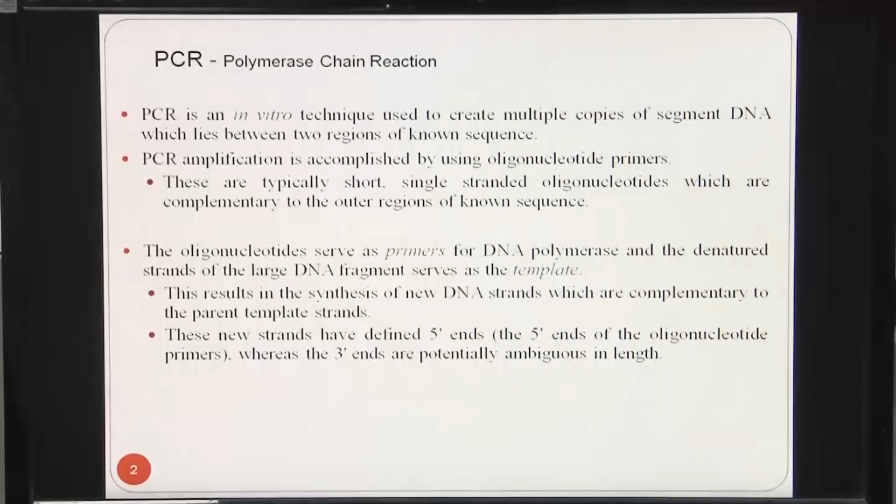Let us discuss details of PCR initially, basically why we are carrying out thermal cycling. So, PCR is polymerase chain reaction, which is an in vitro technique used to create multiple copies of segment DNA, which lies between two regions of known sequence.

PCR amplification is accomplished by using oligonucleotide primers. These oligonucleotides serve as primers for the DNA polymerase reaction, and denatured strands of large DNA fragments serve as a template. So, we initially take a PCR mix in which the targeted DNA, primers, thermostable DNA polymerase, nucleotides and cofactor for DNA polymerase are mixed together to make a PCR mixed solution.

After that annealing happens. We carry out annealing at 55 or 54 degrees centigrade depending upon the requirement of the gene amplification. The 5 prime to 3 prime primers bind to the two strands which were created during the earlier heating step.

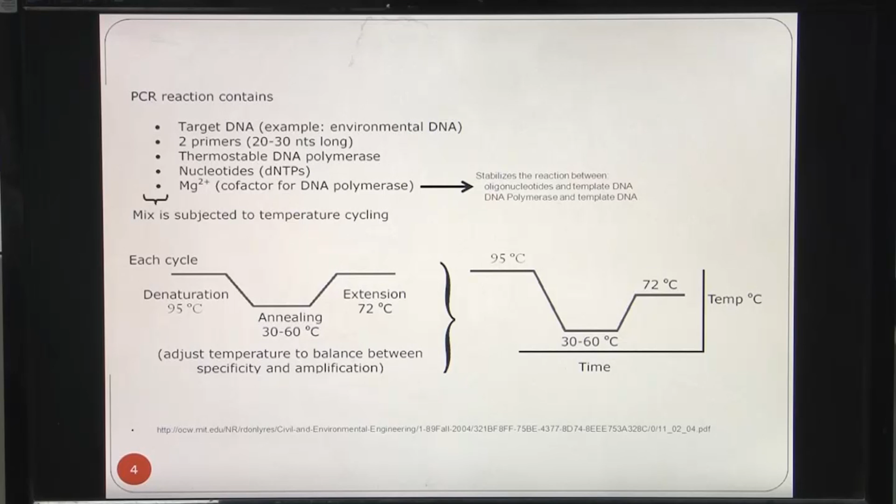Also, for heat toleration, we add magnesium cofactor for DNA polymerase for the stabilization of the enzyme, and also nucleotides, dNTPs, so that they do not get denatured, to carry out the polymerase reaction.

So now we will focus on that. As far as we discussed, we have to carry out thermal cycling to perform the PCR reaction. Here, software by National Instruments gives an opportunity to program graphically in coded form, so that we can maintain those temperatures we have discussed: 95, 55 and 72.

Now we will have a small introduction about LabVIEW, how LabVIEW works and how information flows in the program. There are various blocks and interfaces like for loop, while loop, etc., which are used in text languages like C, Java, etc. But it is far different from those. It uses a graphical language.

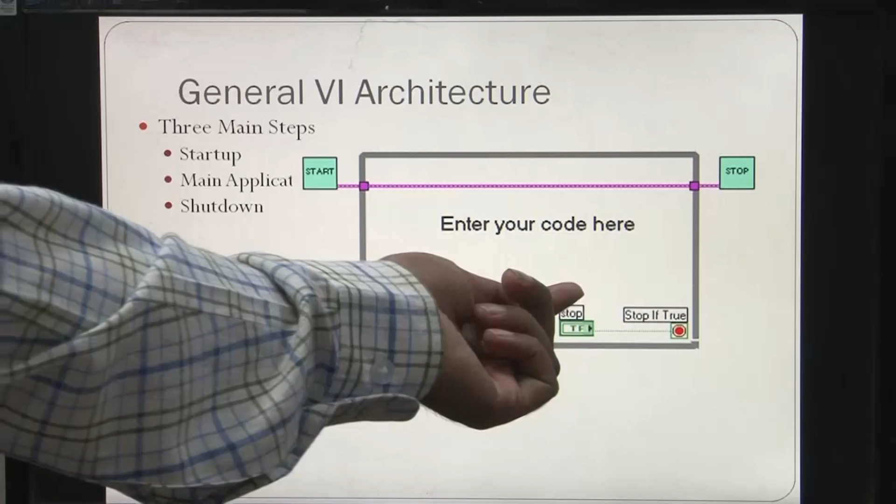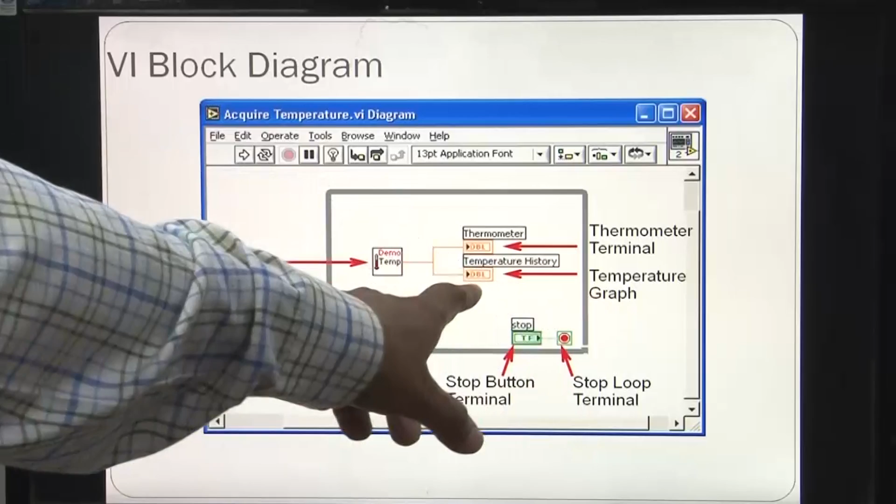So, here the thermometer terminal is called, and the temperature graph will be plotted over there, which is shown on the front panel. And then after the calculation we can stop. The stop button is also provided here, which is shown in the block diagram. So, these are the main components of a LabVIEW program. Again I am repeating, one is the front panel, the other is the block diagram.

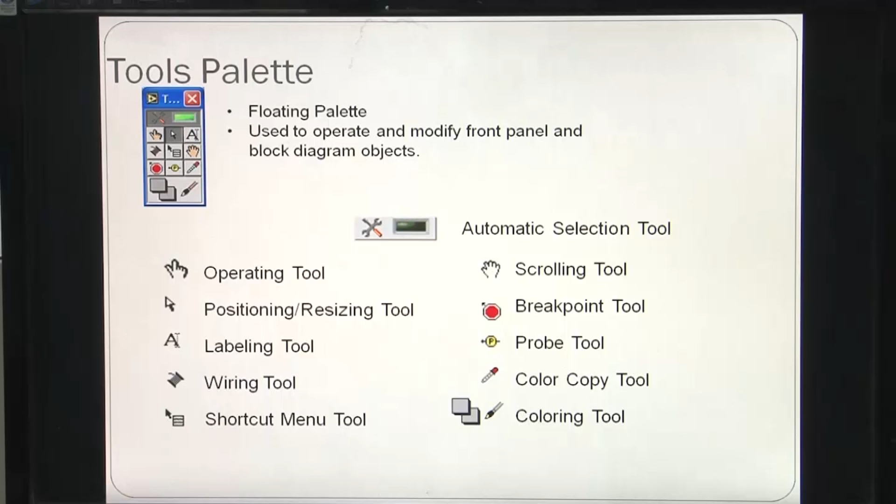So, these are tools palettes. There are different types of tool palettes, as I already discussed. These are the symbols shown there: operating tool, positioning/resizing tool, labeling tool, wiring tool, shortcut menu, scrolling tool, breakpoint tool, probe tool, color copy tool and coloring tool.

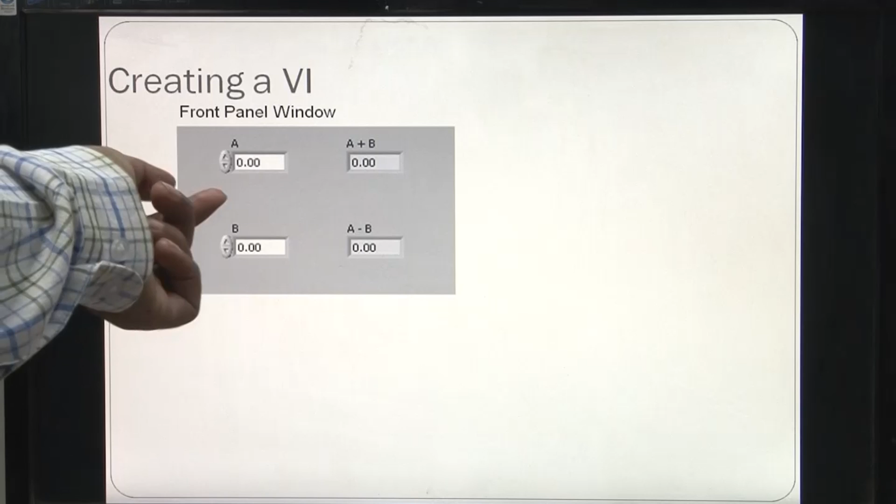The front panel has an A value and a B value. Okay. Now the operation has to be done, A plus B and A minus B. So, whatever values are entered in the A block and B block, it will add or subtract the values, which will be done after execution of the program. So, let us see the block diagram of this.

So, here are the wiring tips for the block diagram. As you can see here in the block diagram, this symbol is attached with this particular symbol. So, how will the information go to this place? The wire is attached to these two symbols, so that whatever value is entered here has to be transferred to the next operator, which is basically carrying out addition. That is why these wires are connected.

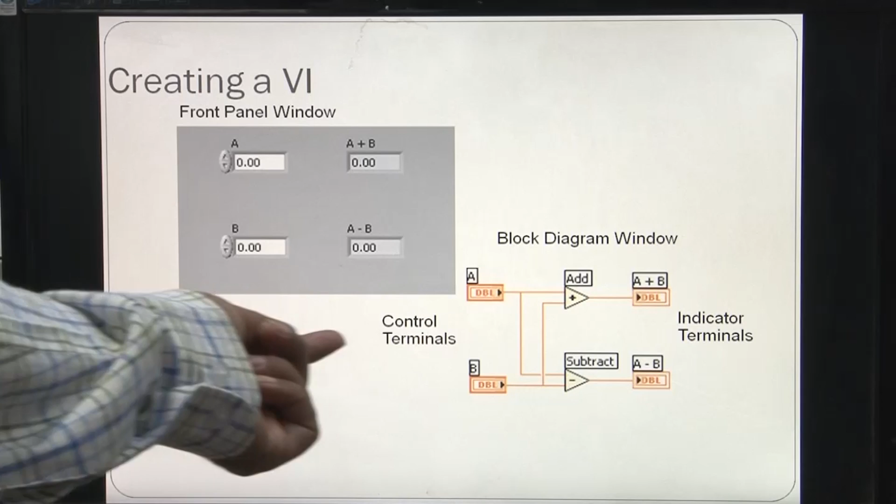In different languages like C and Java etc., some parameters carry the information, but here in a graphical language, these wires are basically forwarding the information from one VI to another VI, or one symbol to another symbol. I already talked about it. This is data flow programming basically, how the data will flow. I have already discussed that.

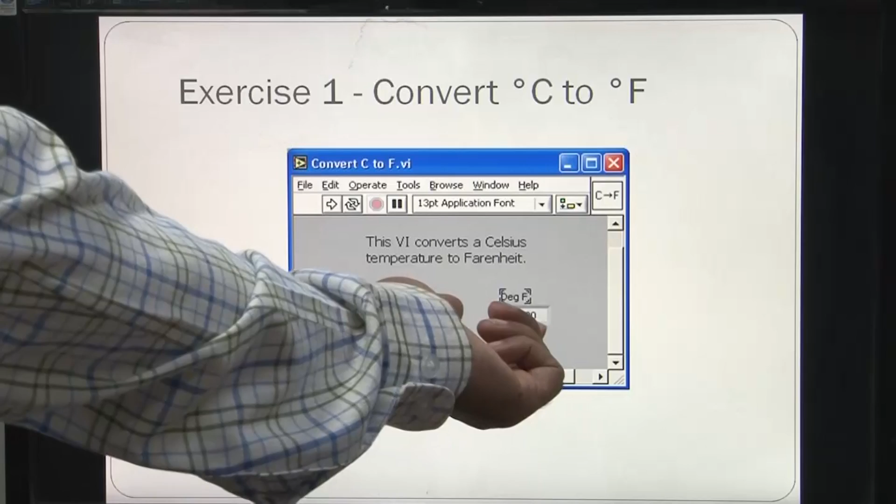If we enter number 1 and number 2, after some operation it will give you some result which will be displayed on the front panel. So, likewise these 3 programs are there that you can see. If you are not able to understand what a symbol stands for, you can go through the help that is available in the software. So, this is exercise 1, where this VI converts a Celsius temperature to Fahrenheit.

So, for debugging we carry out this step, and these are the sub VIs. A sub VI is a single VI which is called in the main VI file, in which we are programming. These sub VIs are called in particular main programs, so they will work according to their programming. These sub VIs can be used within another VI, as I already discussed. So, these are the advantages of sub VIs.

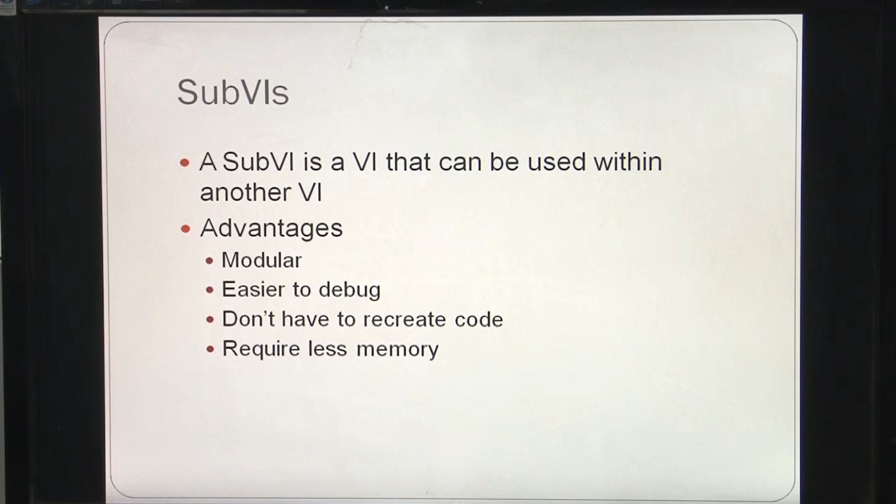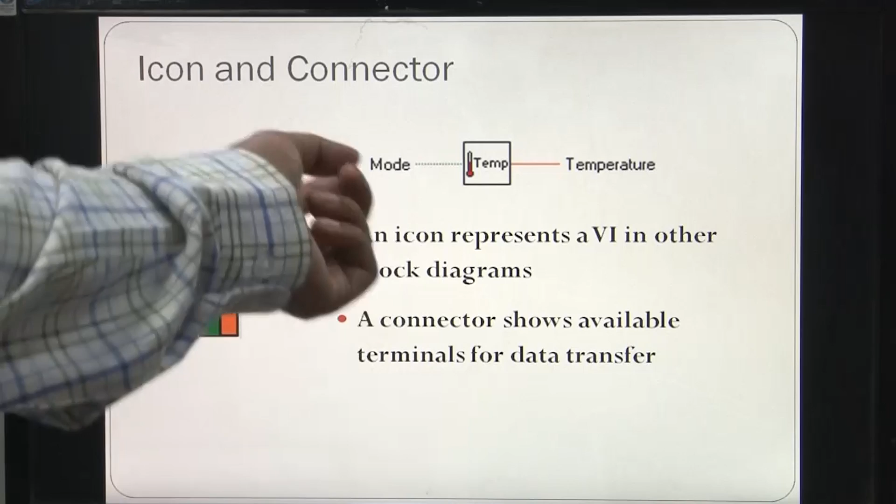So, these are icon and connector. Here we can see the connections are made in the form of different wires, like green and some orange type. You can see mode and temperature. The connections are made over there in a different form.

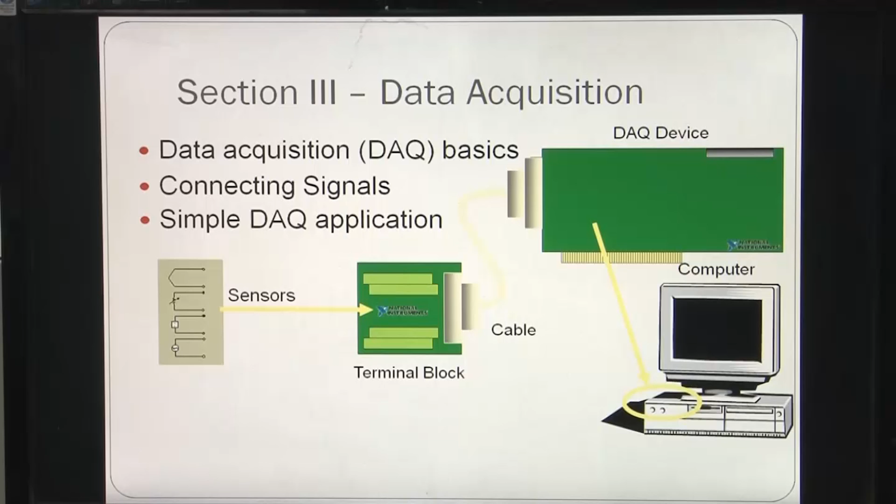So, these are basically data acquisition systems, a plug-in board for a computer with analog input channels and analog output channels, counters, and digital input output. So, a simple temperature acquisition example is this, with two parameters: device 1 and channel 0.

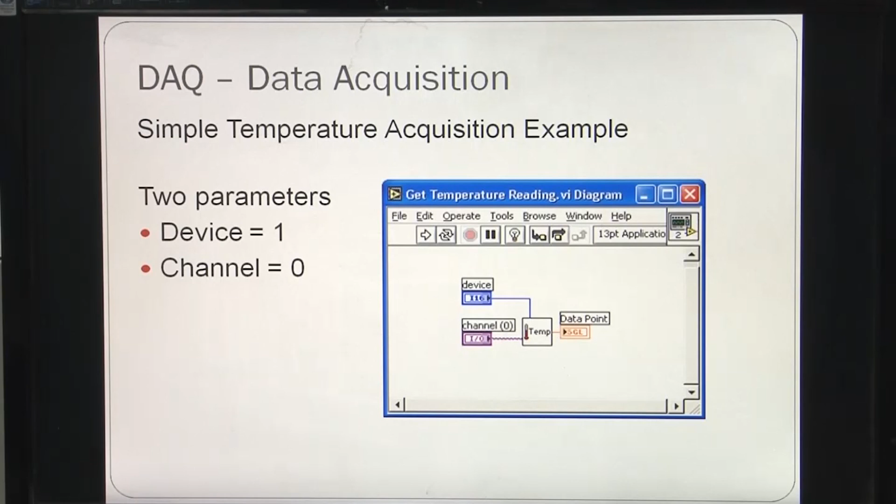So, device 1, which is called here I16, will be a kind of thermocouple that will measure, and the channel is where this thermocouple is mounted. So, the channel address is there. So, that is how we have created this data acquisition. After sensing, the data will be displayed on the front panel.

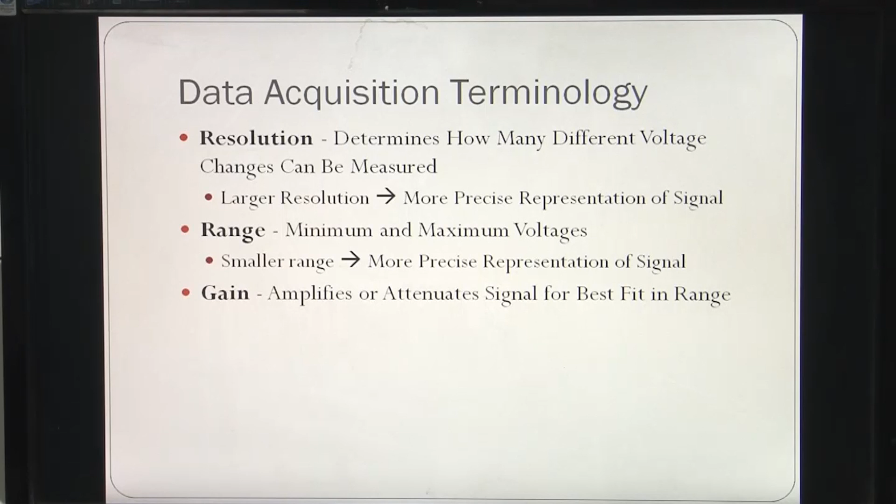So, let us discuss loops and charts. Different loops and charts are used in LabVIEW programs, like for loop, while loop, and different charts and multiplots. Loops have an iteration terminal. The while loop always runs once and then runs according to the continue terminal, while the for loop runs according to the input value, whatever value you provide, like if you want to run a program 10 times.

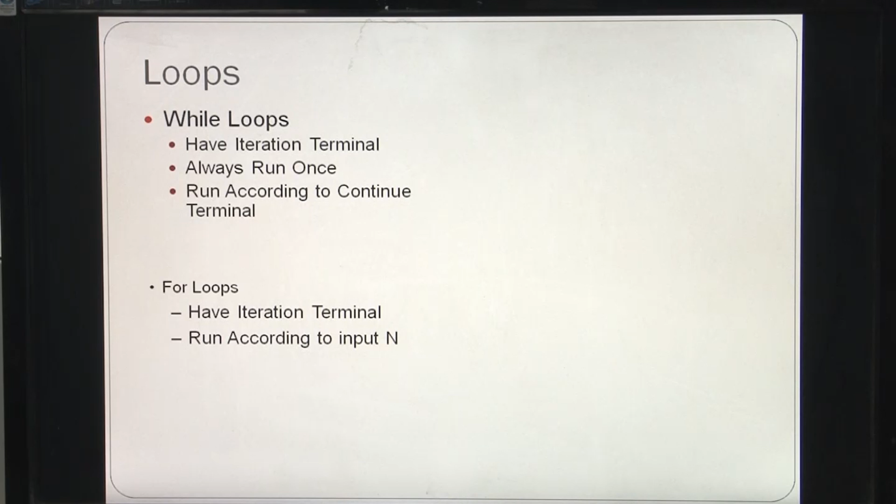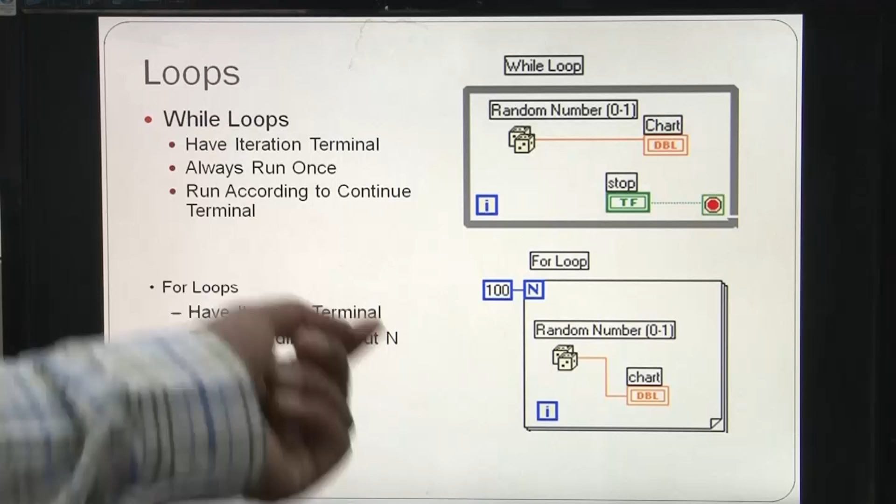So, whatever values are created can be displayed on the chart, and here you have provided a value of 100, while here you have not provided a value, because the while loop works in such a manner that when you switch it on it will run continuously until you stop it, while the for loop will run up to the particular cycle or point which you specify. So, these are important loops on which the whole LabVIEW program works.

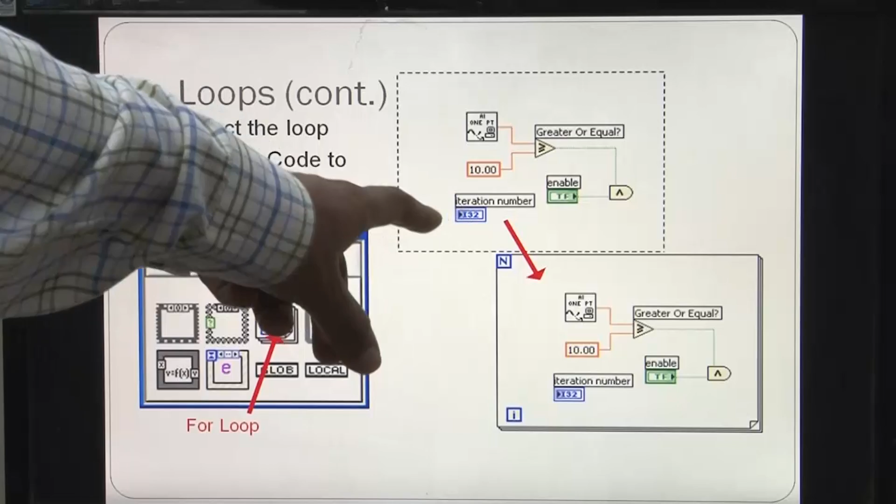These are loop structures. These are different loops shown here. Here you can see this symbol shows a for loop. So, if a for loop is applied, you can call it like this. If a condition is given, greater or equal, then whatever number you supplied initially, if it is greater, it will show on the front panel, or the iteration takes place depending upon the coded instructions.

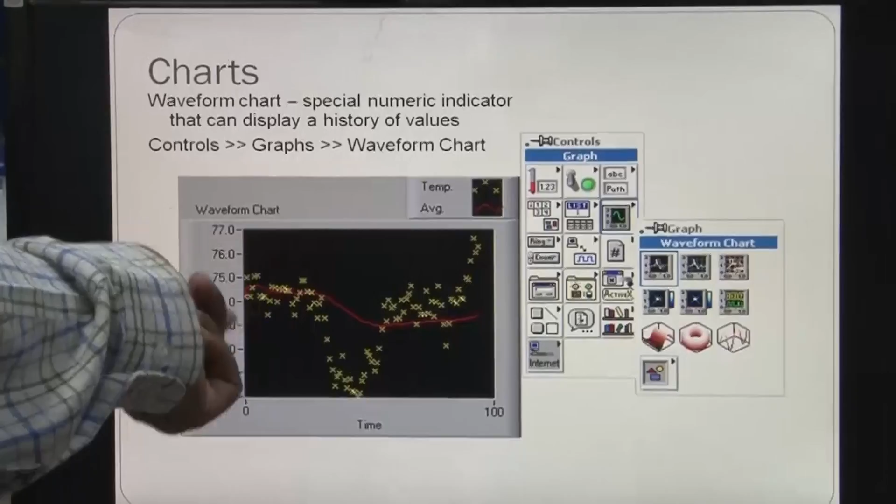So, these are charts. Whatever value comes as an output can be plotted over a chart in the form of different parameters in which you want to plot. These are symbols for plotting the graphs. These can be coded. These are small VIs which already exist in LabVIEW, which you call in the main program, which will create those charts.

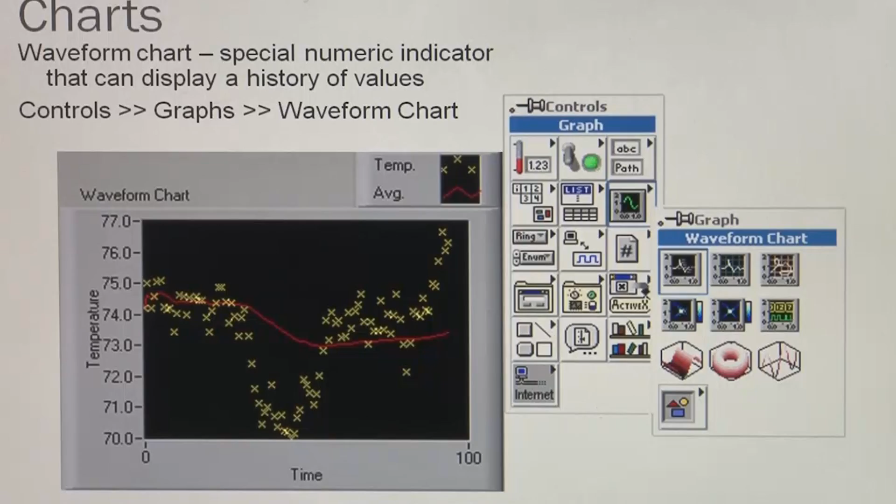So, whichever type of chart you want, you can modify according to your requirement, like whether you want to carry out a 3 dimensional study or a 2 dimensional study. So, you can use different charts for different purposes. These are wiring data into charts, like single plot charts, and this is multi plot charts.

So, for creating multiple charts you have a different symbol, while for a single chart you have a different symbol. So, that way you can have multiple charts, and this is monitoring the temperature. Okay. So, again this is the same program which we have discussed.

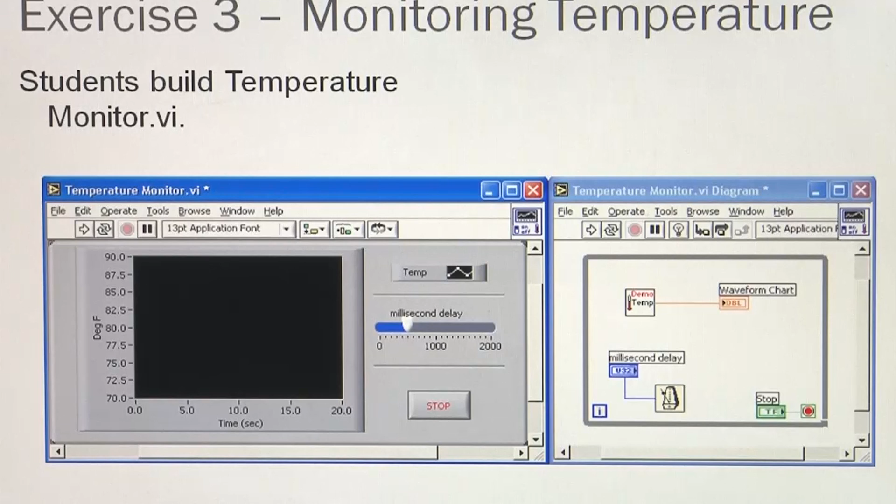As the requirement of the operation, those created array values can be written into a spreadsheet, which can be opened in Excel or WordPad. From that particular Excel sheet or WordPad, we can read the information of which column and which row which value is there. That way we can see those values, and these are basically adding an array to the front panel.

So adding an array basically places a data object into the shell, a digital control. So here you supply those array values on a front panel, and that will be displayed there, and also the current value will be shown to you.

So that way you can scroll down for the particular column and row to see which element is there, like C11 or C12. Suppose this is one row, and 1, 2 up to 5 columns are there, and they have different values.

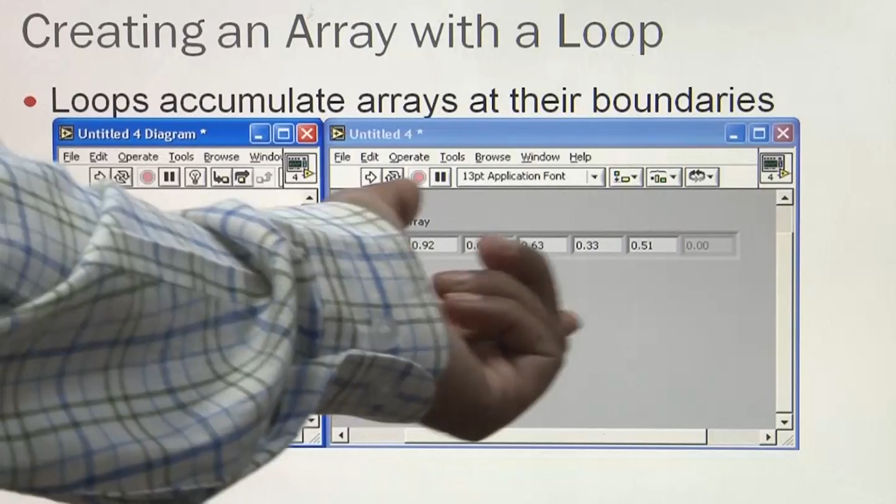So now suppose you want to call the number, suppose the fifth element of this row. We can scroll down and call this number. That will show what number exists at C5, the C5 value, showing you that particular value.

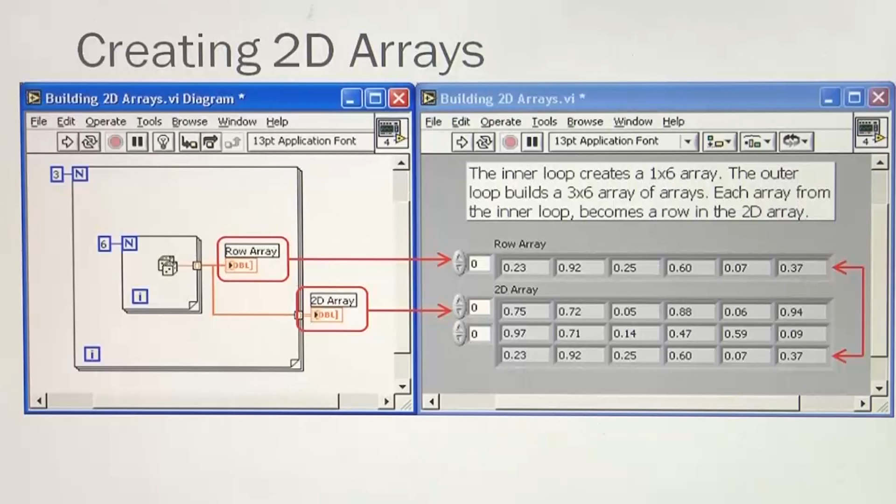So these are basically file input output in which read and write activity takes place. Suppose you want to save data, you have save symbols in different forms available. That way you can read and create an output also. These are 2D array files, basically this is a block diagram of 2D array files.

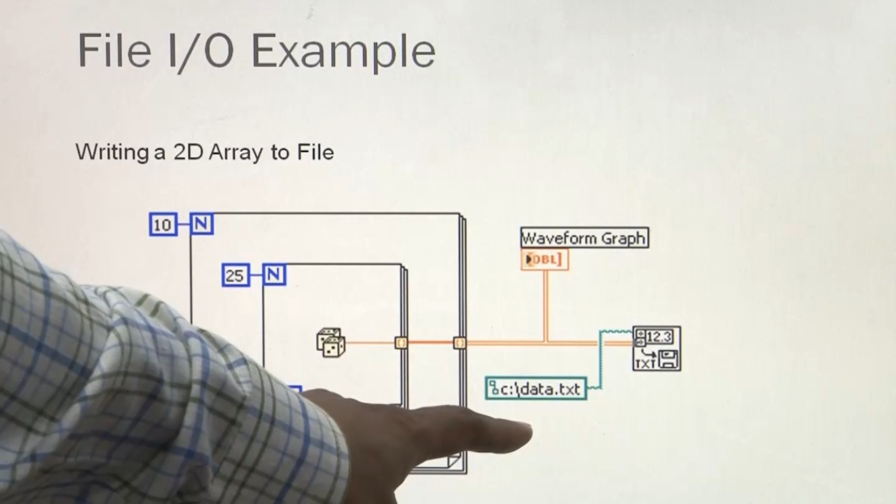Suppose you have a set pattern on the spreadsheet of a particular array. You can call that data which is available with you from an experiment carried out earlier, and you want to analyze it for a certain thing. So you can give a directory to the file, and this directory will be called and executed for making that array, and then that array value can be utilized for the program purpose.

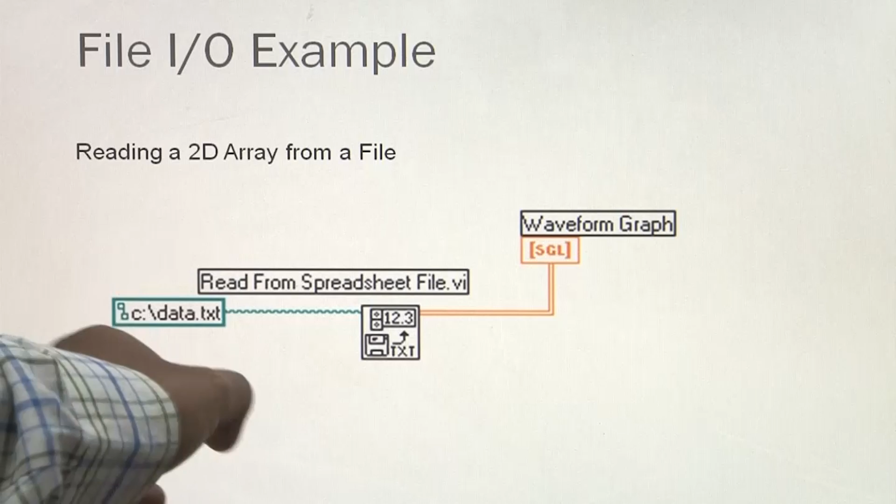This way you can generate the waveform of that particular array if you want. And this is like analyzing and logging data, basically for analysis of data whatever you have got during the execution of the program.

So you have different symbols, suppose you want a mean value, or you want to compare maximum and minimum values, you have a different symbol for that. That way you can analyze that data using the different symbols. So these I have already discussed.

Let us discuss about strings, clusters and error handling. Earlier we have discussed about the cluster symbols, but we will discuss what it is. A string is a sequence of displayable or non-displayable characters in ASCII format.

The cluster basically is a data structure that groups data together. You may have different data at different places, and if you want to put that data together in a particular place, the cluster can be used. Data may be of different types. It is very analogous to structures in C language. Elements must be either all controls or all indicators. So it can be thought of as wire bundles into a cable. This is how a cluster situation can be visualized.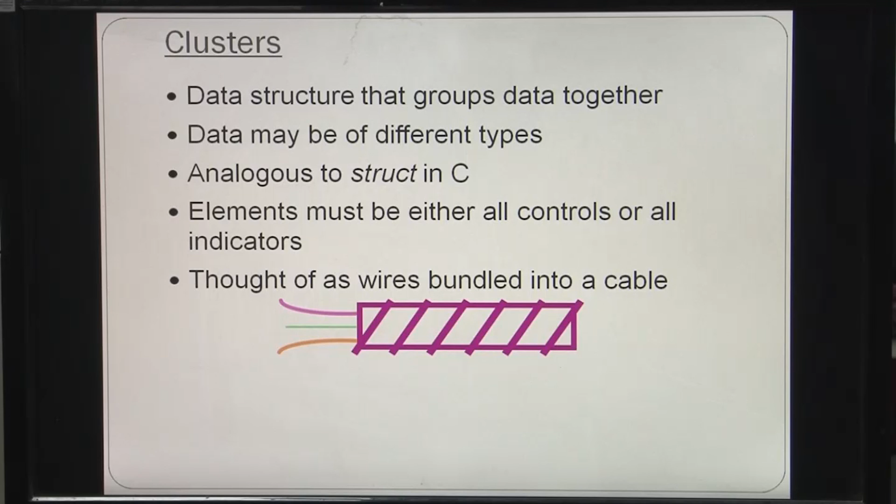So creating a cluster basically, there are palettes available. You select a cluster cell from array and cluster, here you can see the cluster is there. You can put that cluster on a front panel and that way you can create the cluster. So that's what the cluster function does.

In the cluster subpalette of the Functions palette, it can also be accessed by right clicking on a cluster terminal. Suppose you have two components, like component 0 and component 1. In a particular cluster, these values will be entered in different forms - the acquired values will be entered in component 0 and component 1, forming a cluster.

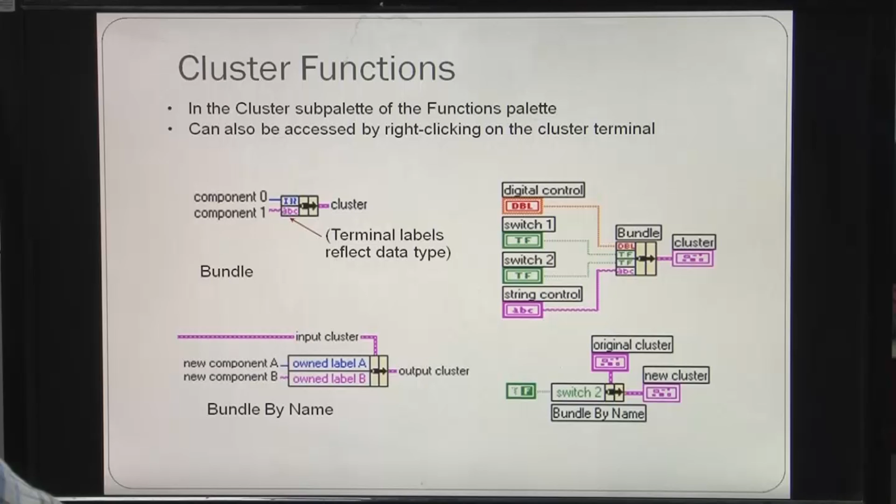That way you have a particular cluster, and there is also the bundle thing. In a bundle you have component A and component B. These bundles can be made by giving those cluster values which have already been obtained from a particular place in the program, so that way you can create output clusters. That's how the cluster function works.

It's showing basically how cluster functions work if the cluster is unbundled. If it's unbundled then different symbols are available in that thing, in which you can enter numerical values, and switch 1, switch 2, and string control are there. Switch 1 and switch 2 work on a binary system, either switch on or switch off, and this comes into the cluster domain.

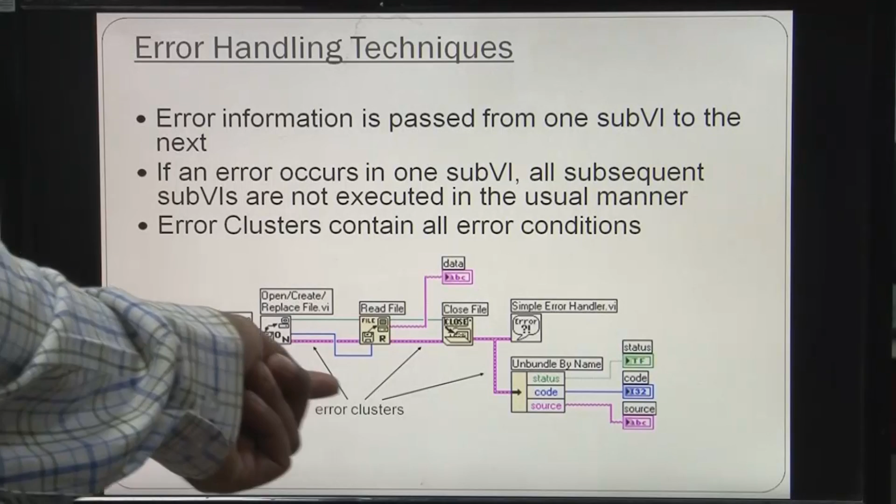There are also errors that exist in a cluster which need to be taken care of. These errors can be controlled through particular error clusters, by putting some error clusters - here you can see those symbols, like these strings over there.

This handles the errors in the clusters which come due to some misplacement of data. So if an error occurs in one sub VI, all subsequent sub VIs are not executed in the usual manner. The error cluster contains all error conditions - it has particular data on how many errors of the particular VI have happened in that program.

One more thing about LabVIEW - it also contains case and sequence structures. In case structures, it is analogous to the if-then-else logic, where we carry out a justification of whether the condition is true or false. If it is not true, this information will pass, or if it is true, this information will pass.

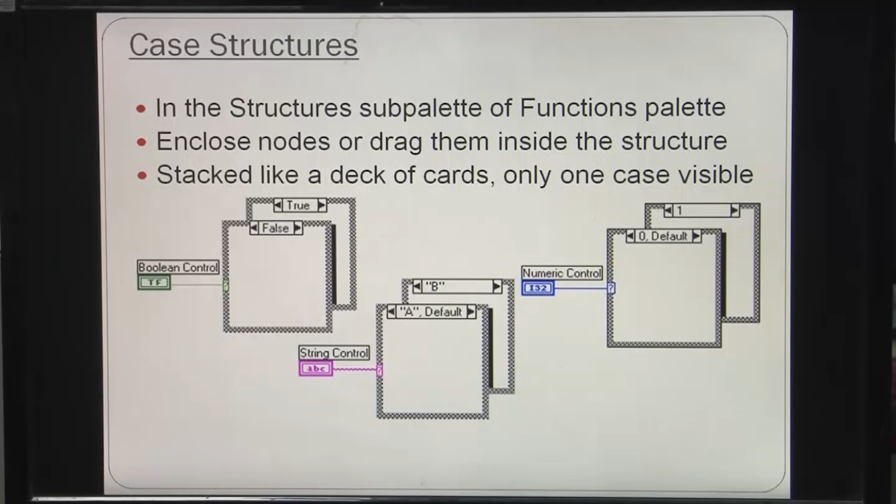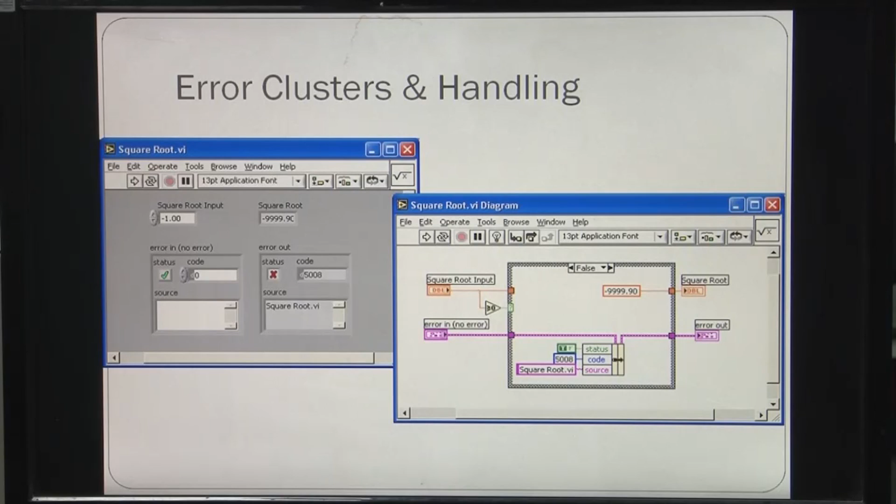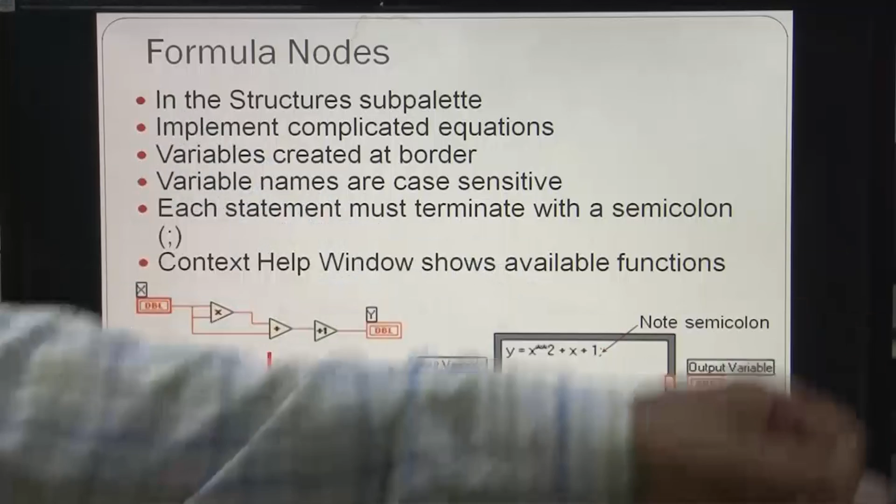These are formula nodes basically, used in the structure sub palettes to implement complicated equations, suppose you do not have sub VIs for complicated equations. You want to have a calculation on that particular equation, so you have certain parameters which need to be supplied in the program, and output has to be obtained. So you can type those equations and put in the x values, and the y value can be displayed. When you put an x value, multiplication will take place, then addition will take place, and then you have supplied operator plus 1, so one increment is there. That way this equation will execute and give you a y value, so on what x value, this y value will be the output variable. That's how these formula nodes work.

So now we will have a hands-on or practical session on a particular thermocouple, basically how the temperature will change in a cyclic manner, as the topic was thermal cycling. So we will go to the practical, carry it out, and monitor how the data acquisition is taking place, how the information is passing from one sub VI to another sub VI, etc. Let us discuss a practical session on thermal cycling, let us open the LabVIEW file, the programmed file thermal cycling.

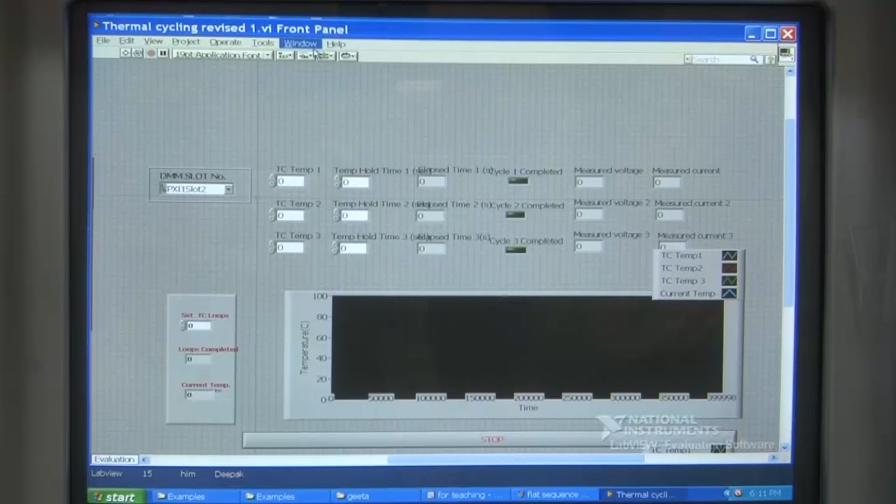So let us open it. Now you can see, as we discussed in our PowerPoint slides, this is the front panel. If you see here, file, edit, view, project, operate, tools, window, help - these are things available on this particular tab. Here you can see window, which will show you the block diagram. When you click the block diagram, you will see how the program has been made by utilizing sub VIs, how these sub VIs are arranged in a sequential manner to carry out thermal cycling.

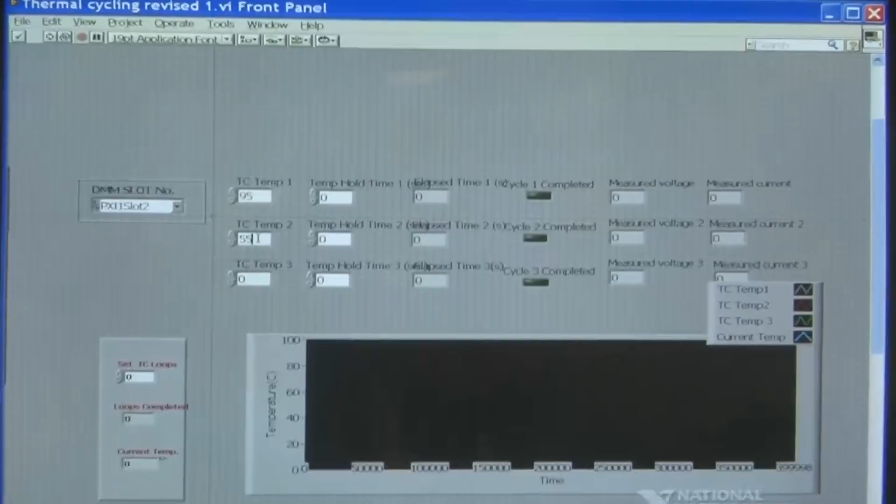Now since we have 3 temperatures, if we go to the front panel window, you have temperature 1, temperature 2, temperature 3. To carry out a PCR reaction, we require a 95 degree centigrade temperature to carry out the denaturation step, so we will supply 95 over here. Then we have the annealing step, which is 55, and then we have the extension step, which is 72.

And then we also have a temperature hold time. So, this temperature has to be maintained for a certain period of time. Since it is optimized, we have found that 15 seconds is the right timing to carry out the denaturation step, 30 is for annealing, and 45 seconds is for the extension step basically.

Since we have to carry out the extension step in which different dNTPs get attached for making another copy of a particular template DNA. So, here we have total loops basically. One loop will be completed if these 3 temperatures on different times are completed. Generally we carry out 20 loops or 30 loops to amplify a certain PCR mix solution for the detection purpose.

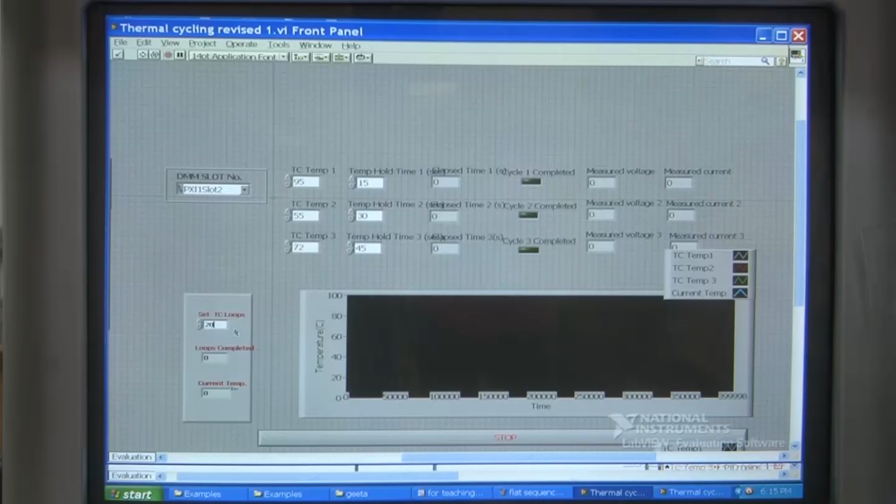So, let us say we have 20 loops basically. For a practical session, let us take it as 5. So, the number of loops I have taken is 5. Before that I discussed debugging. Debugging takes place in the block diagram. When you go to the block diagram, this has to be understood: the whole thing will behave in the manner in which these VIs are placed in a while loop, a for loop, or a case structure etc., which I already discussed in the PPT.

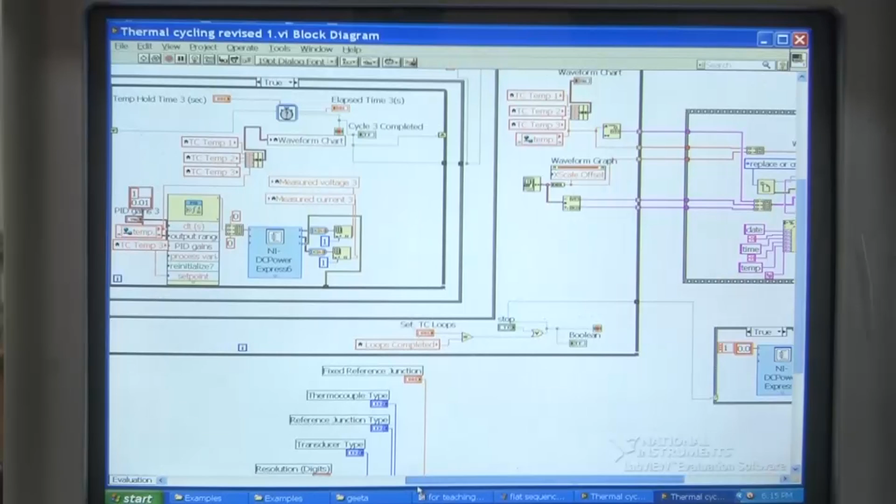So, here you can see this bigger rectangular shape is a while loop. I discussed this while loop. When you execute the while loop, it will run until you stop it. Okay. And this rectangular one is a case structure.

So, inside the while loop you have a case structure, and again inside the case structure, you can see here, this is again a case structure, and here you have a while loop. So, you have 1, 2, 3, 4 rectangular shapes, in which one is a while loop, the second one is a case structure, the third one is a case structure, while the other is a while loop. So, whatever icons you are putting here will be executed on the particular condition given in the while loop or in the case structure.

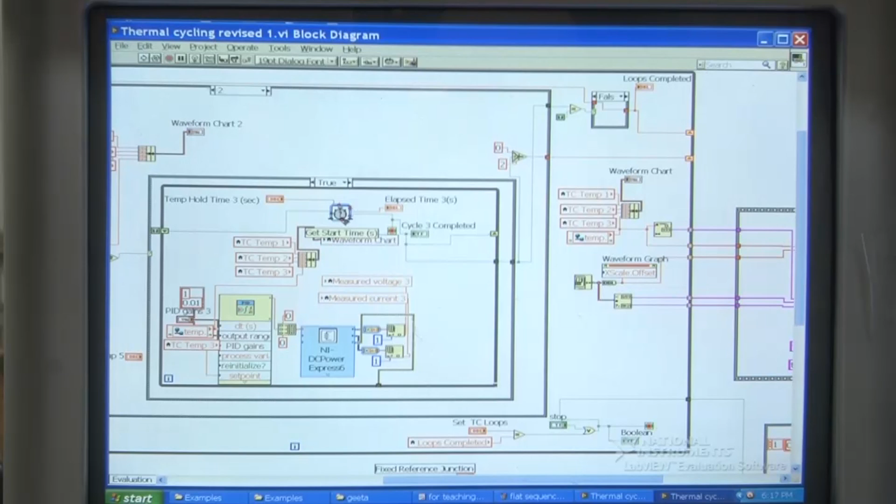So, this icon you can see is the start time, at what time you have started. In the front panel I have kept those values like 15 seconds. This clock will start once I execute the program, then it will calculate the elapsed time. And this is the temperature hold time, how much time it has to be held. This value can be supplied through this icon.

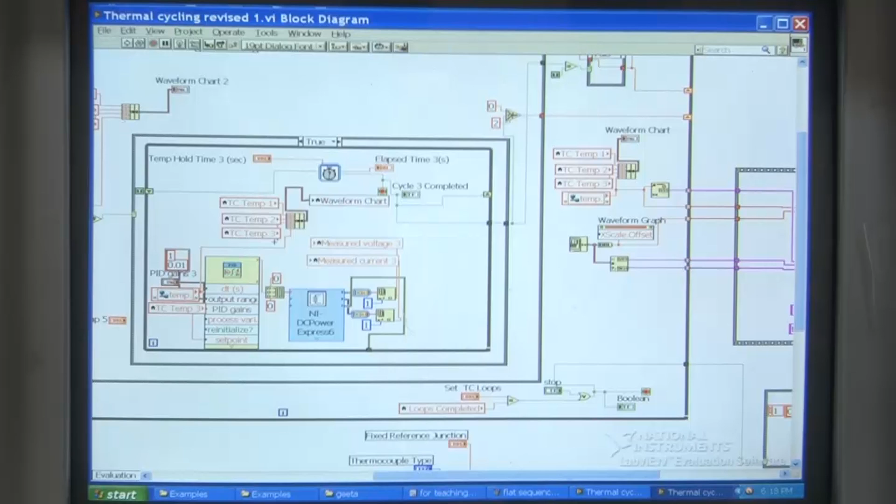This icon is displayed in the front panel where I have entered that particular value, and this way it monitors the cycle, whether the 95, 55, 72 cycle has been completed or not. If not, then this program will run again. So, here we have 3 temperature zones, 1, 2, 3. I have supplied those 3 different temperatures, 95, 55, 72. So, here you can see the icon.

So, it is a bundle basically. I have discussed the bundle; a bundle carries different values. That is why it is used here, and here you can see the PID controller. Here PID gains are available. PID, proportional integral derivative, basically compares the output value with the initial value which is entered, like temperature 1, suppose I have entered 95.

So, it will monitor; the sensed signal will come to the PID, suppose it is 80, and then it will say okay, this cycle is not completed, so the temperature has to be raised. So, more gain will be there. It will multiply those things, and it will continue up to 95 degrees centigrade.

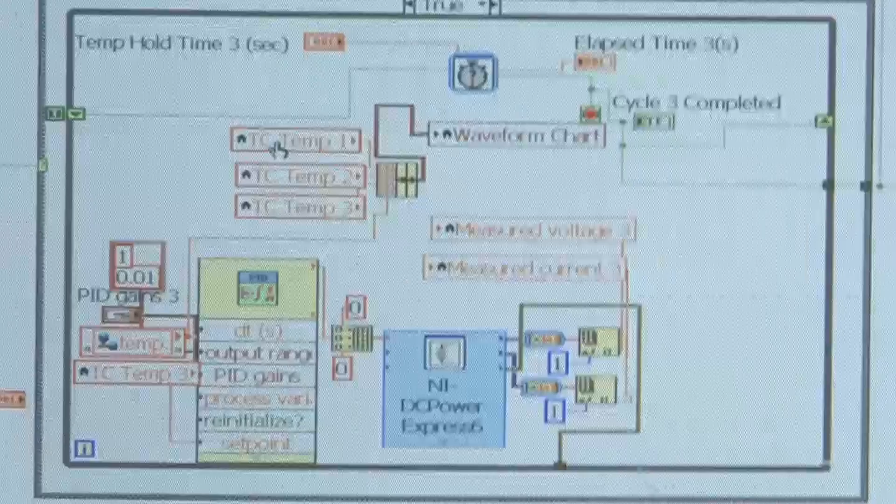When it is 95 degree centigrade, the PID will give the signal that 95 is reached. That is why here you can see in the PIDs these different parameters: time is there, dt, output range is there, the PID gains are there, process variable is there. Then you have a re-initialization and then you have set points. So these are various parameters for the

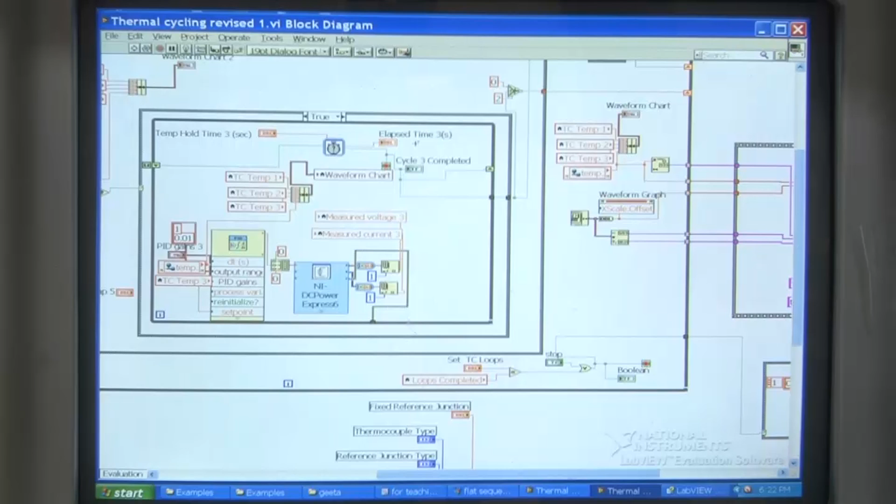PID controller. That way this PID works to control the temperature which has to be kept at, suppose, 95 degree centigrade for 15 seconds. So it will compare those outputs, and when the time elapsed reaches 15 seconds, it will show 95 is there, then it will go to the next temperature.

Let us see the debugging action. The highlights of how the information will flow will be shown here when we execute from this run icon. Suppose I run this. The whole window is dull now, except this one, which has taken value 5, the number of cycles which has to be completed, and then date and time is there. Now, what temperature is supplied?

It is giving those temperatures and the current temperature, which you can see in the front panel is around 110, which needs to be lowered. So it will automatically lower the temperature. Here the information is flowing from DC power, measuring the current and voltage, whether the current and voltage is supplied or not.

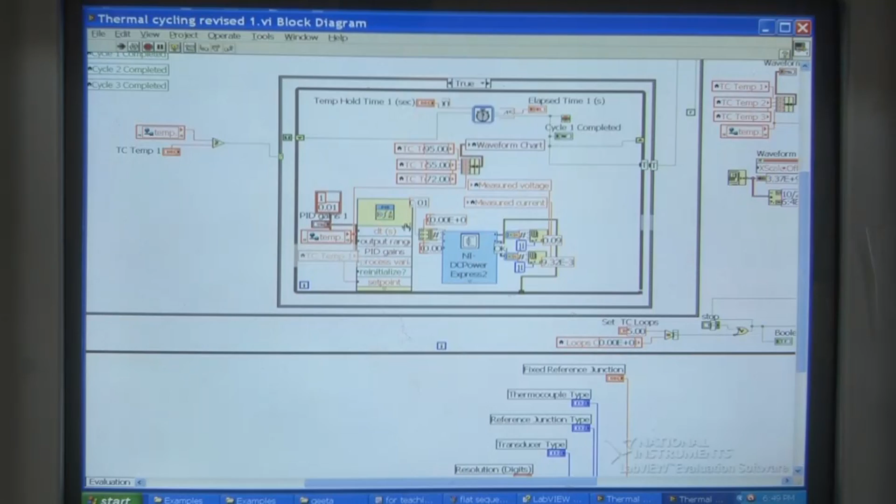Here you see the timing is compared with the 15 seconds supplied for 95 degree centigrade, how much time has elapsed for 95 degree centigrade, and then again it is given to the PID. PID is proportional integral derivative. It works on certain algorithms given by different researchers. It works on PID gains, proportional integration factor, time and output range. That way the PID compares the value and tries to stabilize the value which is required.

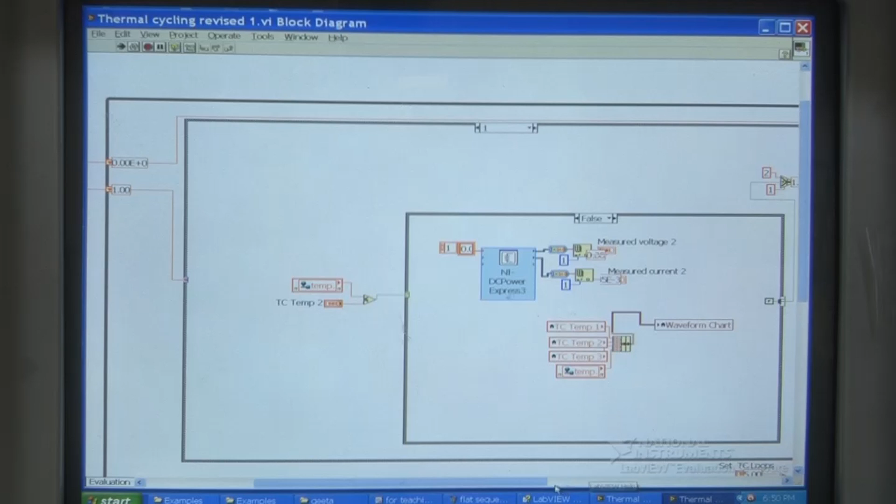Now, if the statement is false, the false case structure, a while loop, will perform the task. Here you see the information is flowing from this window, and again the set loop is there. The current temperature is 44, now it is set and plotted on a waveform, and now it is true. If the condition is true, the PID controller is on. If the condition is false, the PID controller is not on.

These two rectangles you are seeing are the two given conditions, true and false. When the condition is true, the PID controller will work to stabilize the temperature for that particular amount of time, which is the hold time given in the front panel. Here you see the information is supplied, now the PID out is 1.

Now the information has flowed from NI DC Power to these bundles, which collect the values, the measured current and voltage. These measured current and voltage will be supplied to that particular chip if it is required to increase the temperature. Now the current temperature is 44, and here it is 77. On the front panel it is around 80, so that will also be around 80.

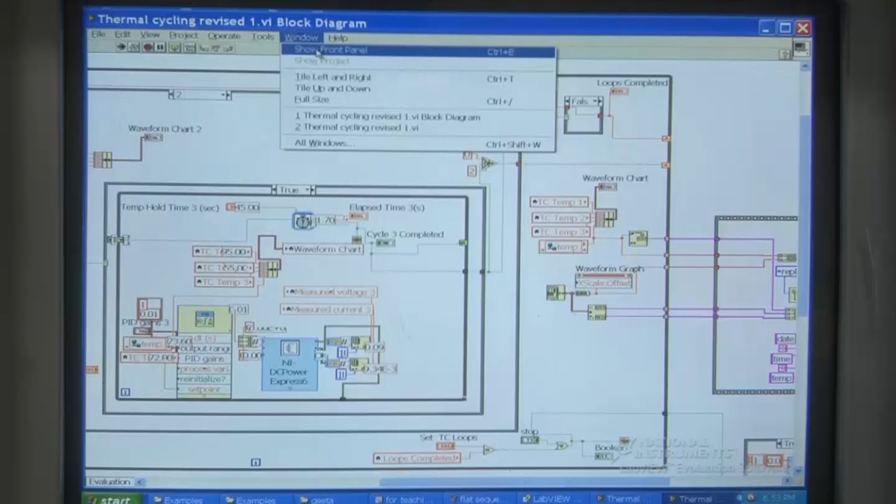And again, let us see how much temperature is required and how many loops are completed. If you see, the temperature is 63.

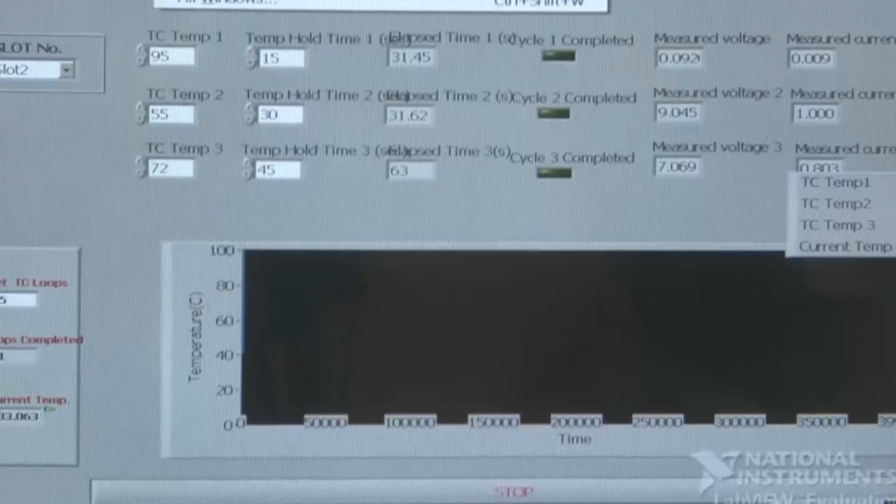So, number of loops completed is 1. Here you see number of loops; I have supplied 5 loops. Now, the 72 step is completed. So, it will go to the next cycle, which will take 95 degree centigrade. So, now the temperature is getting increased, and let us see how the information is flowing.

So, it is basically the false condition, in which DC power will supply the current to the chip for the heating, I square RT heating, and then it will measure the current and voltage. Okay. And then again it will see whether the set loops are completed or not. If not, then the cycle will be repeated. So, here the cycle is executed.

You see again this information is flowing from here, then it is sent to this place, that is the waveform chart, and now see the true condition is there, that means the temperature has reached 95 degree centigrade. So, the true condition is on. So, that means now cooling has to take place. So, this is the current temperature, around 95, which the PID controller has detected. The PID controller has the value which is sensed by the thermocouple.

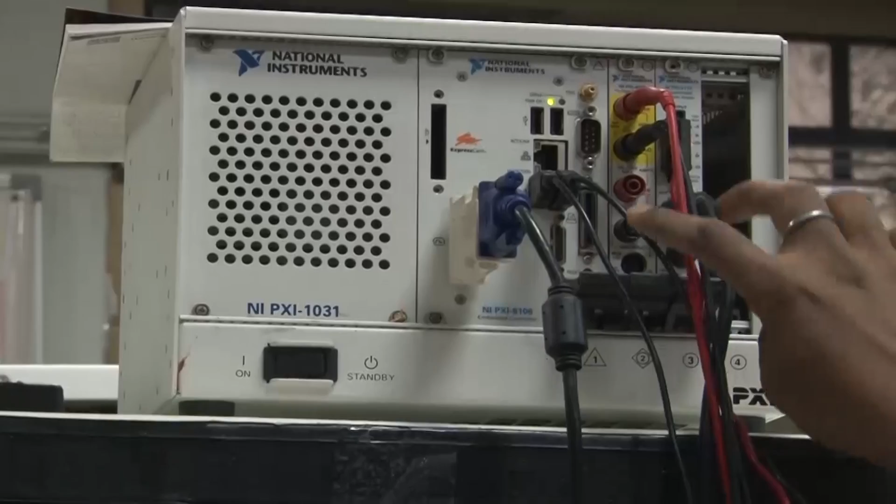So, here you see this is the NI PXI box. The NI PXI has a DMM module and a DC power supply. The DC power supply is used for heating the chip, while the DMM, digital multimeter, is used for measuring current and voltage, and those measured current and voltage are displayed over here in the software. So, that value is plotted.

Now, you see the heating has to take place, because here you see the temperature is around 55. So, this is 55. So, now the heating has to take place. The false condition is there. So, that means heating has to be done to get the 72 degree centigrade temperature. So, here the DC power will supply the current required to the chip, and the voltage and current will be measured, and the cycle will be executed for that.

And here you see again it is checking whether the cycle is completed or not, whether these 5 loops are completed or not, and so now the current temperature is basically okay. The current temperature is how much? You can see around 41 basically. So, why is it getting down?

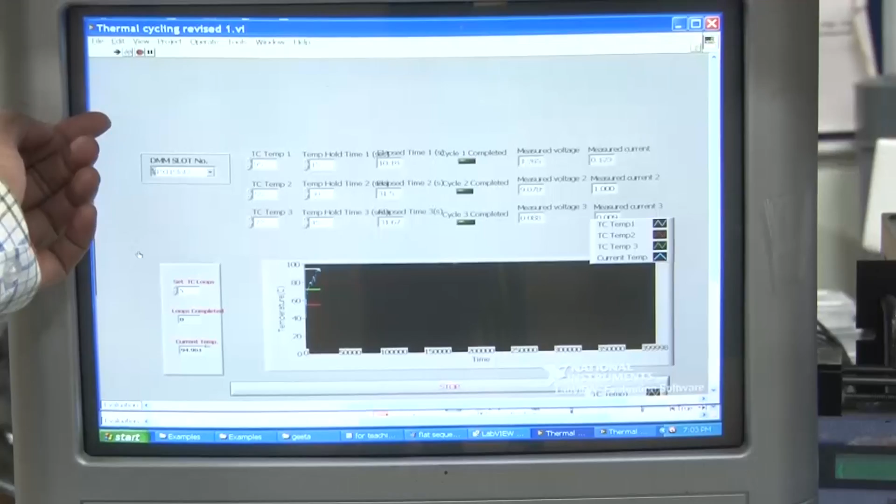Okay. So, this is LabVIEW software. The VI is programmed; the name is thermal cycling. So, we are having 3 temperature zones for thermal cycling: 95, 55, 72. 95 is to be kept for 15 seconds, 55 degree centigrade has to be kept for 30 seconds, while 72 degree centigrade has to be kept for 45 seconds, and the number of loops we have entered here is 5.

So, you are seeing that this value is changing. This is the current temperature, which is getting monitored through the thermocouple by the DAQ cards. So, here you see the NI instrument NI PXI 1031, which has DAQ cards. One is a DMM card, the other is a DC power supply card.

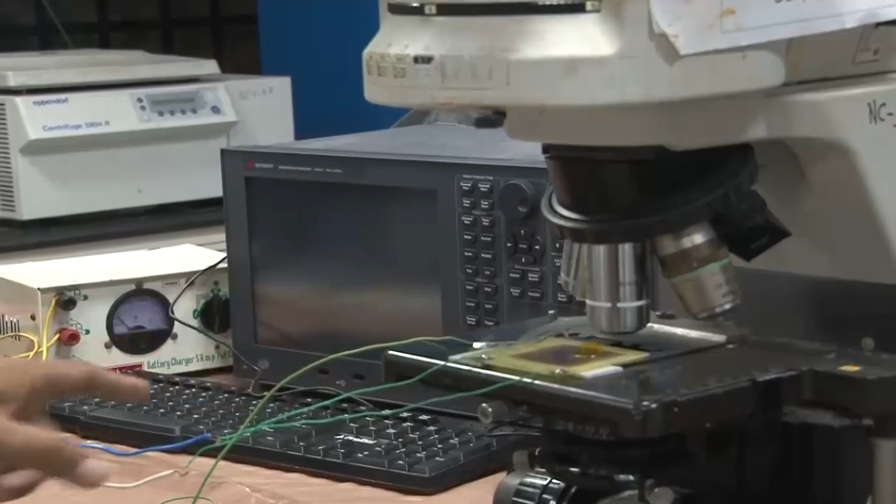So, the DC power supply card is used for, you see here, giving DC power to this chip, and the temperature on the chip is getting monitored through the thermocouple, and that thermocouple is directly attached to this DMM digital multimeter DAQ system. So, it is acquiring data of the temperature and giving those values through the DAQ card to the software, and that software is showing the temperature which is currently available on the chip.

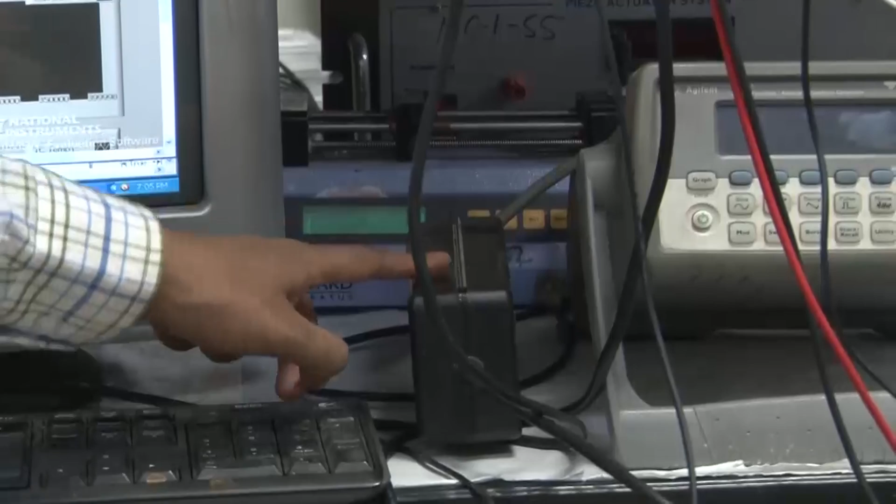So, here the power supply is there, and an additional power supply is also provided here to make the heating step as early as possible, since we require sudden heating and sudden cooling in PCR reactions. So, that is why this arrangement has been provided. This is the whole setup: one is the LabVIEW software, this is the instrumentation part, and the other is the chip, which is getting thermal cycled utilizing these 3 systems.

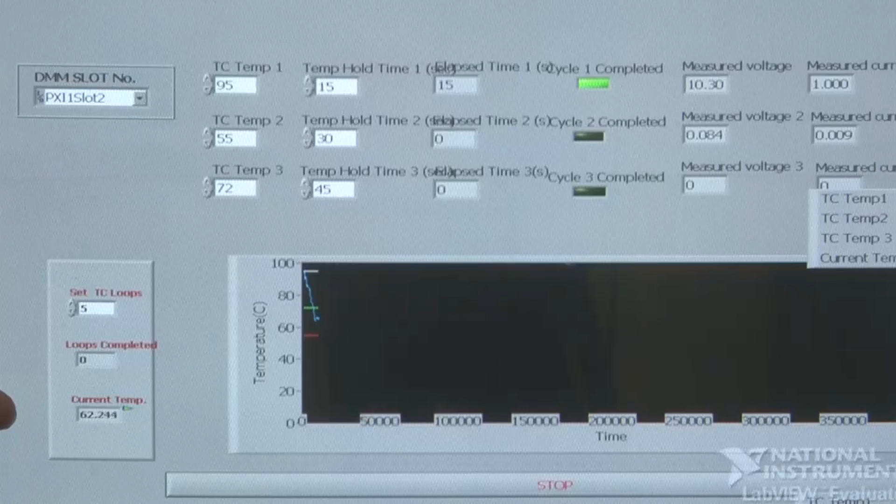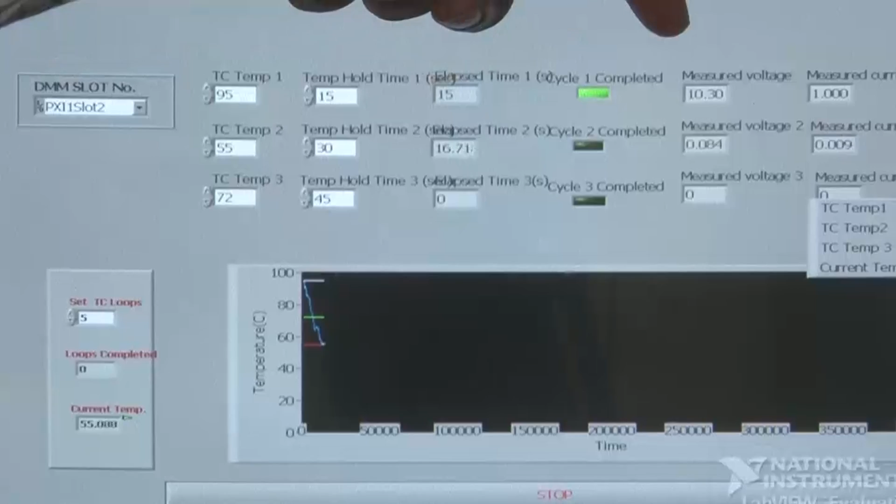You see different tabs also here. So, here you see measured voltage, and here measured current. These measured current and measured voltage values are coming from the DMM card, the data acquisition system. These values tell how much current has to be supplied to the chip so that I square RT heating could take place.

So, now you see this 55 step is completed, and now the 72 step has to be completed. That is why you can see the increase in the graph, the increase in the temperature. So, now 72 has reached. You see the elapsed time is calculating; for 45 seconds it will continue heating at this particular temperature, which is 72, and during this you can see the voltage and current which are changing here.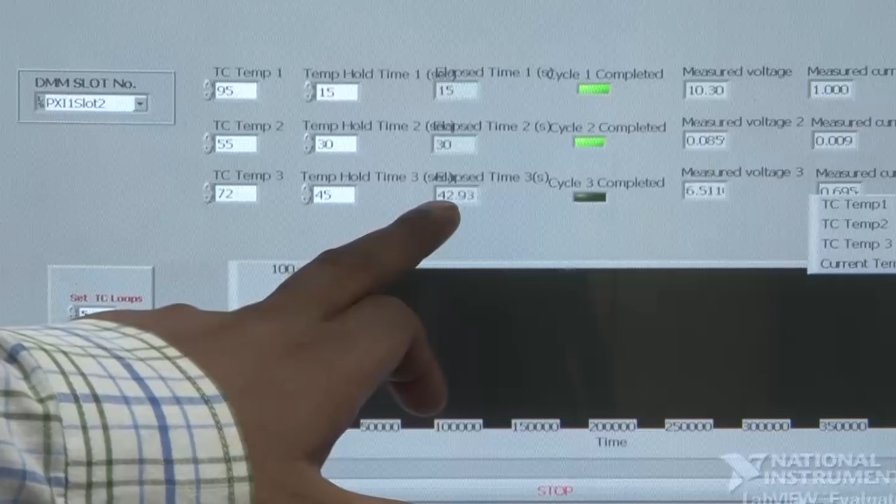So, the elapsed time is almost completed. I think it is 43, so it is 45. So, these three temperatures are completed. So, loop 1 is completed. Now, loop second, that means cycle second. So, temperature 1 has to be attained, and now the heating takes place. During the heating you can see the measured voltage is 9.8 and current is 1, and the temperature is increasing, which can also be visualized by this graph. That way you can see on a real time basis how much temperature has been reached.

So, you see it is now reaching 95. When it reaches 95, it will be held for 15 seconds. Now, it is around 95. So, now the elapsed time tab is on. It will continue up to 15 seconds. You see, around 10. After that, this temperature step will be completed.

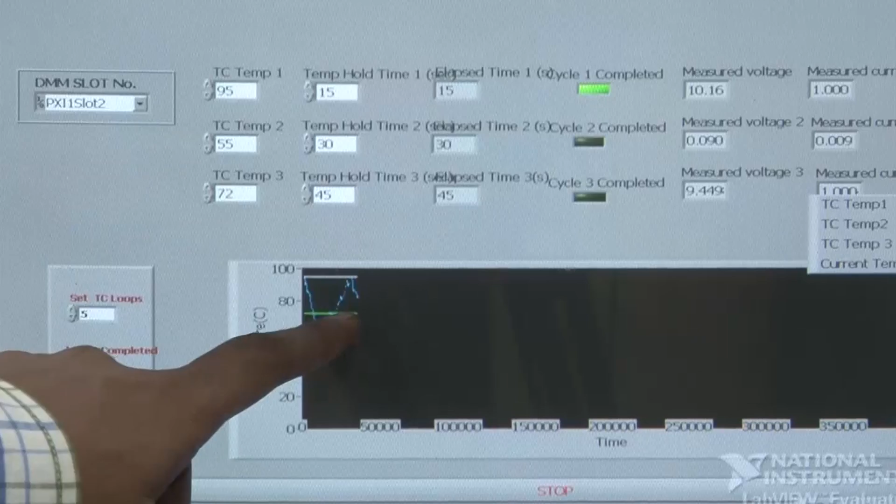Now, it is completed. Now, the 55 degree centigrade step has to be attained. So, the value is decreasing, and you can see the graph is also decreasing. It will come to 55 degree centigrade, and again it will be held for 30 seconds. That is how the cycle will be repeated. For more visualization, we can see here one loop is complete, that means one cycle is completed. After the 72 step is completed, we will have 2 loops completed, so the number of cycles completed will be 2.

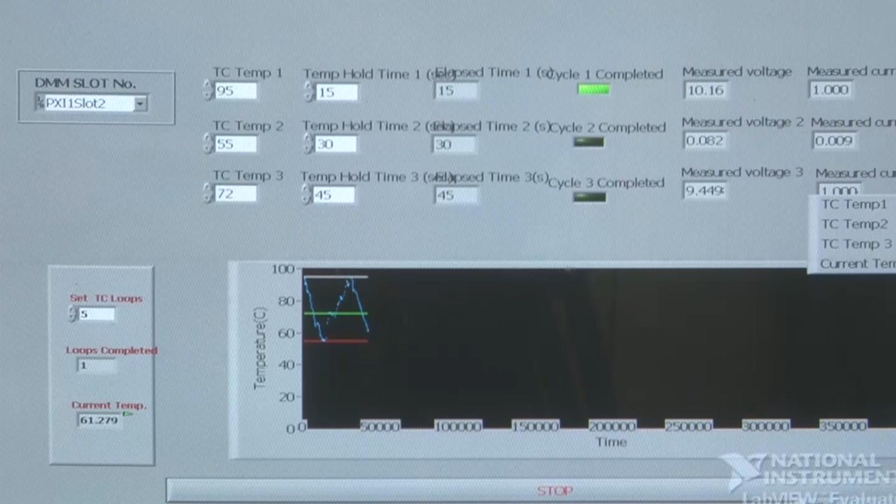Now, it has reached 63 degree centigrade. Now, you see 58. Now, it is 55. So, this clock has started counting to 30 seconds. It holds this temperature for 30 seconds. So, this is the annealing step. Next is the extension step, and the first one I discussed is the denaturation of the DNA molecule.

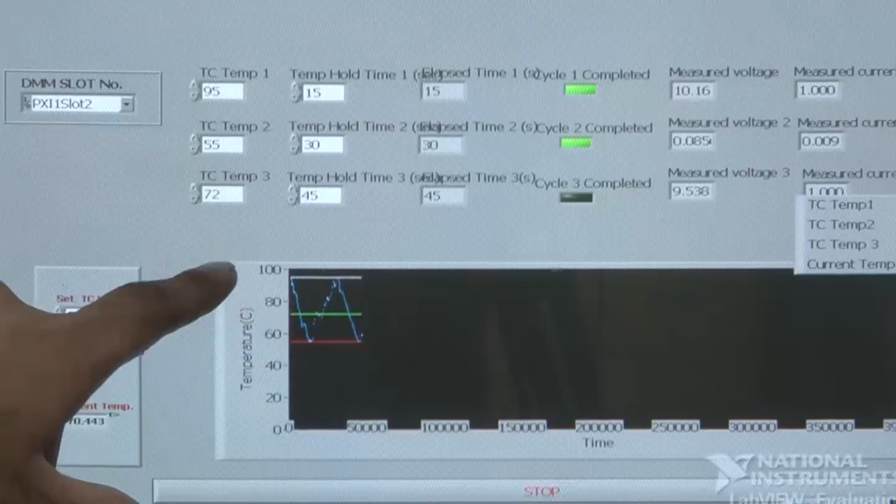Okay. So, now the temperature has to increase from 55 to 72. Now it is increasing. You can see this line corresponds to 55, this line corresponds to 72, and this horizontal line corresponds to 95. Here you can see this dot; the temperature is increasing, it is 72. So, this clock is running, and it will run up to 45 seconds, so that it will reach this particular level.

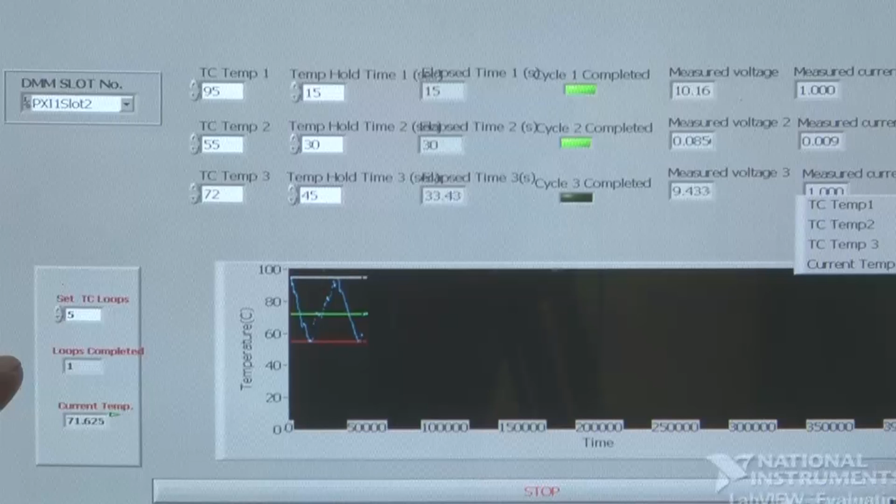After the 72 step, the number of loops completed will be 2. Okay. Now, you can see number of loops completed is 2. So, that is how cycle 2 is completed. One is this, second is this. And the cooling and heating is carried out on the chip.

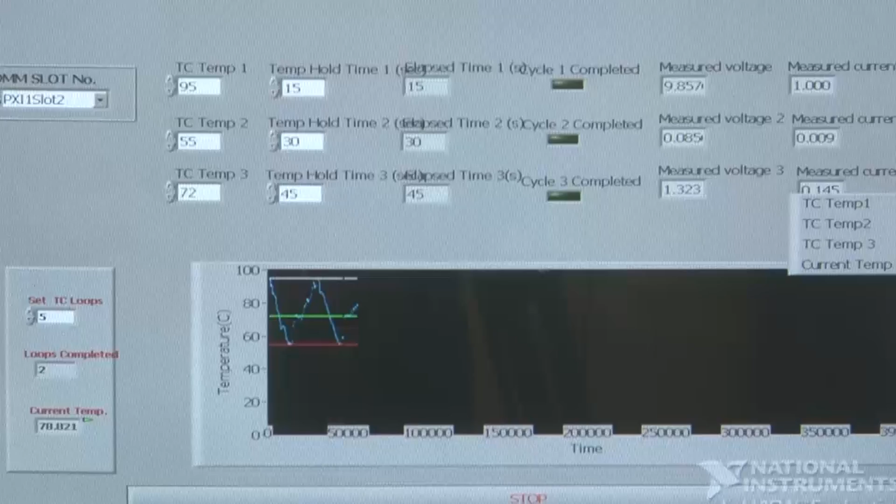And let us see the execution of the program. I talked about how LabVIEW has a front panel and the block diagram. So, let us see the block diagram. In the block diagram you see how the execution is taking place. Let us highlight this thing. So, okay.

Okay, so you see the information is basically flowing. From this point to this point, here you are seeing those temperatures. These are basically case structures in which true and false conditions are given, and it compares whether the loop is completed or not. If completed, then exit from the program.

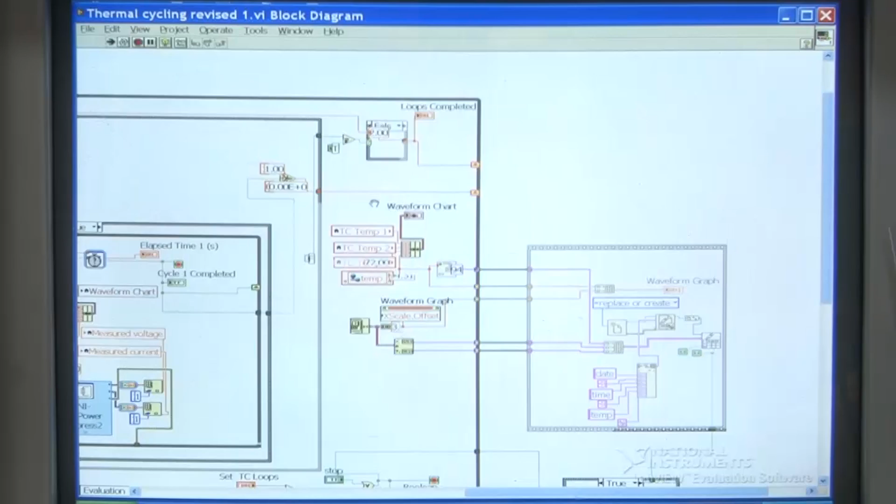So, if heating has to be done, then... now the temperature is around 100 degree centigrade. So, here you will see the heating is there. So, the cooling needs to be done. Okay, this is 72. So, right now the heating is taking place. So, this is the true condition.

Here you are seeing the information is flowing from measured voltage, measured current, and from this to this place and then this place, and it is comparing whether the condition is false. Two loops are completed, that is showing, and these loops have to be 5, which is the condition given here, then it will stop. So, here the information is flowing.

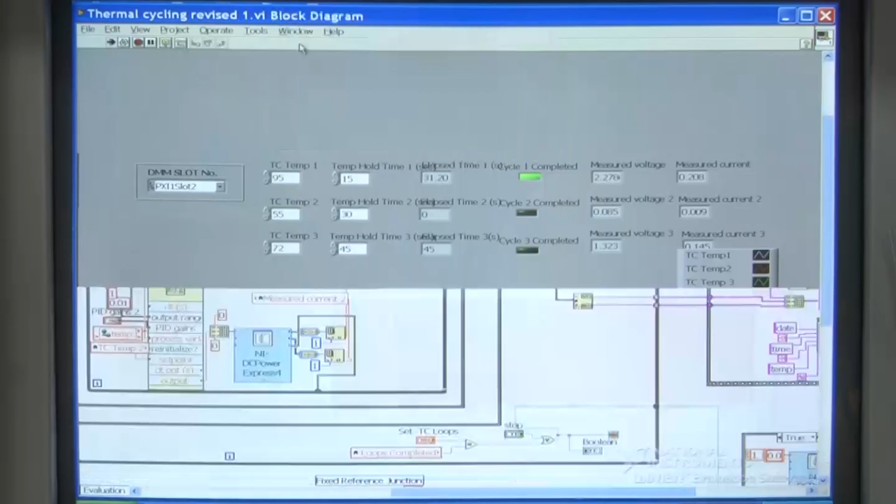Okay. So, here now the temperature is 55. If 55 is there, you see the true condition is there. Now, the heating will take place. So, the true condition is there. The current temperature is around 48, in true condition, 53. So, the heating is taking place in true condition, while if here the false condition is there, the cooling will take place.

So, these rectangles you are seeing are the while loops, this is again a while loop, this case structure, and this case structure, and this is our while loop. So, that way this PID will run up to that particular point where the number of cycles is not completed. These are currently 2, which is shown here, and when it is executed, the 2 cycles will be shown here.

So, here you will see the current temperature. Okay, now it is 88. So now the PID has to reach 95, that is why the PID is on. If it reaches 95, then it will come down, then the false condition will be on. So, the cooling takes place.

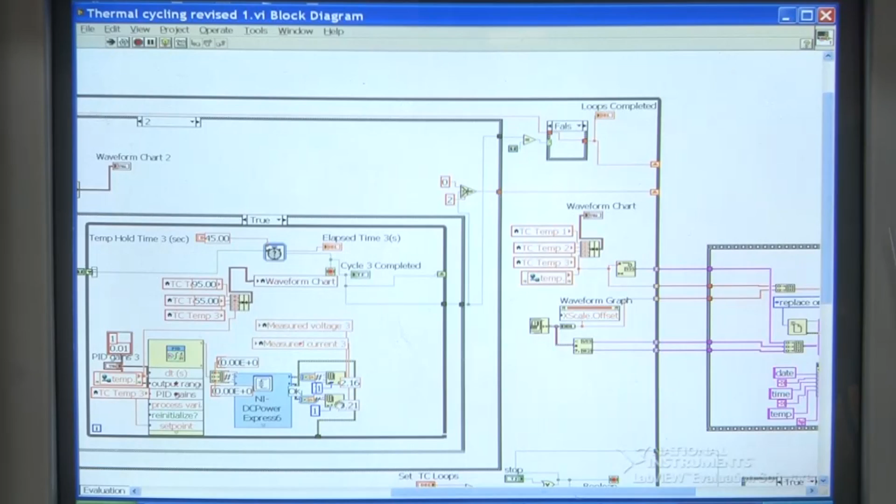Okay. So, that way we have 4 rectangular blocks here and 1 block here. This is a sequential structure in which the operation will be carried out in a sequential manner. That is why this sequential window is kept here, and here again the case structure is there where additional DC power is applied for the heating; as I told earlier, we have used 2 batteries for the chip heating.

So, here you see the current temperature is 57, and if you go to the front panel, you will see around 50. So, it is correct, and now you can see the value, how the information is flowing. Number of loops completed is 3. So, it is showing the number of loops is 3.

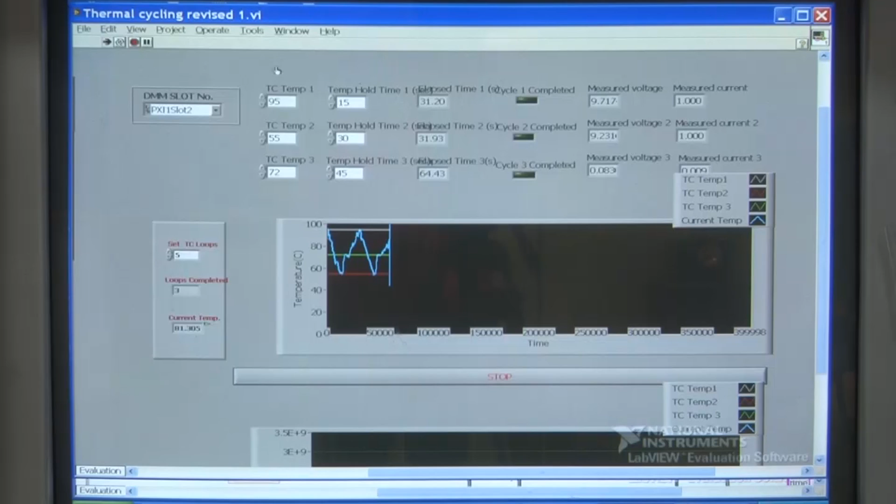This is the block diagram of the developed program. Here you see 4 rectangular blocks. In one block this is a while loop, inside the while loop you have a case structure loop, and here you have again a case structure loop.

There are two conditions available, whether it is true or false. So during true there will be heating, and when it is false there will be no heating. That way basically to control the temperature.

The PID controller is proportional integral derivative, which works on the Ziegler-Nichols algorithm basically. So the PID controller compares the output value to the set value, like I have supplied different temperatures 95, 72, 55. During heating and cooling conditions, it calculates whether the required value has been reached or not, and if it is reached, then it gives the information to the waveform chart.

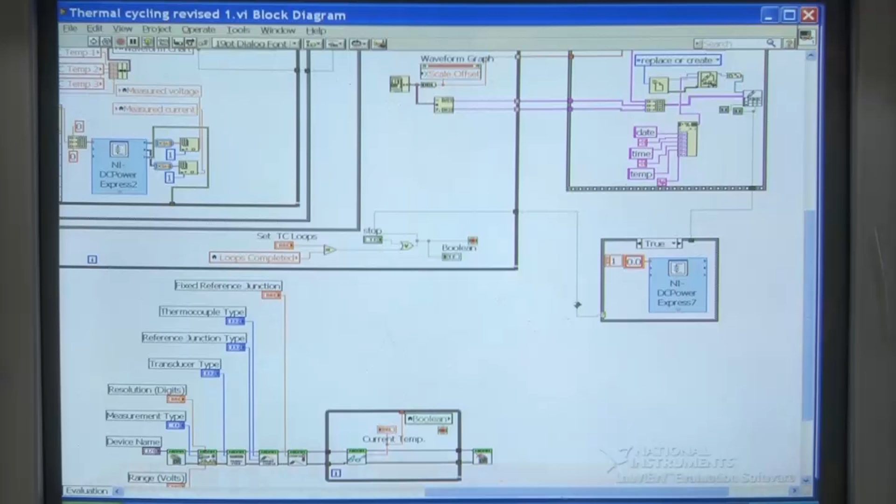This is another block which works on, basically, again a case structure. The case structure may be true or false. If it is true, it will provide the DC power to the system, to the chip, while if it is false it will not provide DC power to the chip.

Likewise here also, if it is true, DC power will be supplied for heating, will provide DC power to the chip, while if it is false it will not provide DC power, so the heating of the chip will not take place.

Here you see again a different block, this is a while loop. In the while loop you have a Boolean condition in which the current temperature is getting monitored through the thermocouple, and error is also getting monitored.

This is the icon for the DMM module. The DMM module is called here, to provide the value to this particular place.

Where the current temperature is getting entered, and this thermocouple is required to define these different things: fixed reference junction, thermocouple type, reference junction, transducer type, resolution digits, measurement and device name. This device name is thermocouple, which has already been supplied.

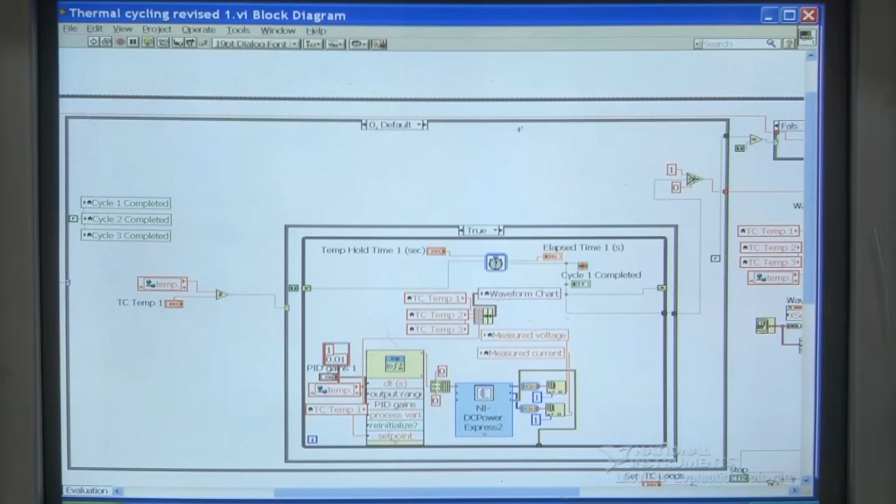The case structure, the point to be noted here, has the conditions of true and false. As I discussed in the PPT, the while loop does not have these things, because the while loop works on a principle that it will run until you stop it. Since we have not provided a condition for the while loop itself, but under the while loop we have provided a condition through the case structure, the temperature is getting monitored and timed for a particular duration, by which thermal cycling is being carried out.